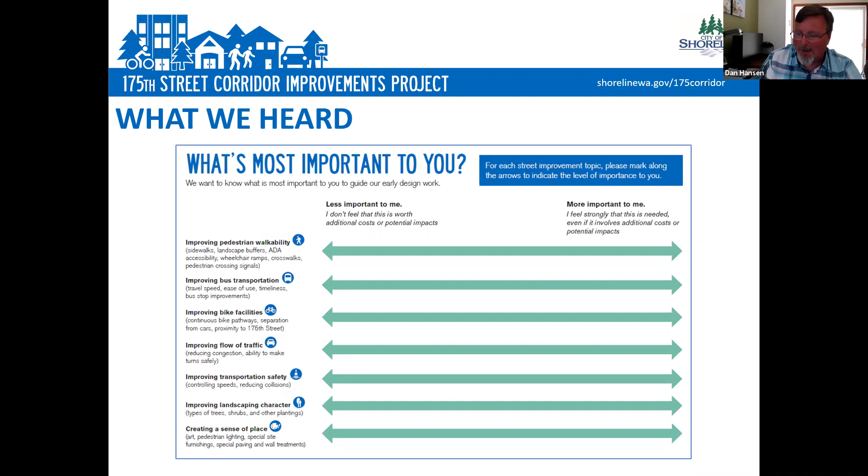So, slide 2. We had the evaluation criteria covered in phase 1. First, pedestrian walkability, or sidewalks, the ability to get through the corridor for all modes of transportation, including ADA accessibility for wheelchair ramps, crosswalks, and pedestrian signals. Bus transportation, transit speed, ease of use, timeliness, and bus stop improvements. Bike facilities, a continuous path separated from other modes so they have their own way to get to and from along the corridor.

Vehicle traffic flow, reducing congestion at the intersections in particular, and ability to make safe turns into side streets. Safety was also considered for all modes of travel, including controlling speeds, reducing collisions, and providing safe pedestrian crossings. We also asked for input on landscaping, and what kind of things you would like to see along there.

We also asked about creating a sense of place, placemaking, and we will determine potential streetscapes and designs at a later date. That's something we'll work on as we come up with the preferred alternative, which will be in the next round of outreach.

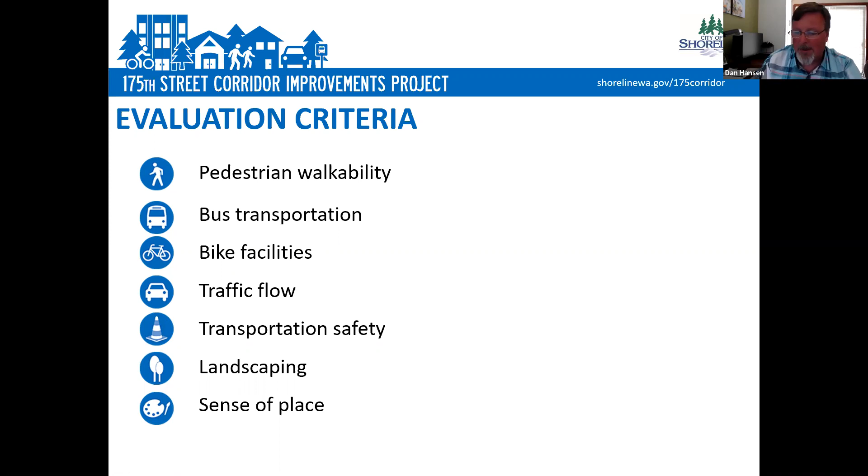So slide 3 summarizes this, and this is how things turned out. The results were weighted and ranked to show what's most important to you. You can see pedestrian walkability was obviously the biggest concern from the input of folks who participated in the survey. So in our current online engagement, we'll ask you to reaffirm that we got this correct.

So we encourage you to go to that site, put your input in, and participate in this round of outreach. We'll also be considering other, more technical issues that we'll need to review to really narrow it down to a single design concept.

We'll weigh the trade-offs of each of those criteria along with your feedback to determine the preferred concept. Items to be concluded include impacts to right-of-way and community impacts to adjacent properties, incorporating the current Meridian Park Elementary improvements along the area, the stormwater and environmental work, and what that cost and impact is, particularly to Ronald Bog in that area, as well as overall project costs.

We don't have an unlimited budget, so we'll be looking at trying to come up with a project that can be maintained by the city for the long term, as well as phasing those options.

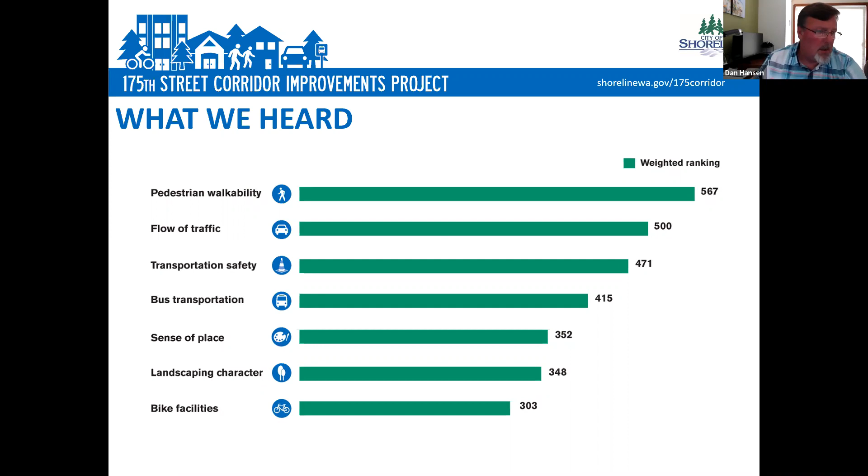So we've spent quite a bit of effort here in the last spring looking through and doing some analysis on what was happening out there along the corridor. We began our initial study of traffic flow and traffic patterns, reviewed safety requirements, and considered existing facilities like the retaining walls, and how we can incorporate those in if possible. We looked at how to make the corridor more accessible to walking, wheelchairs, and buses, and explored how to meet our transportation goals through the city's transportation master plan and complete streets policy. So the alternatives we've developed today really try to look at all those elements and how to address them best. Now I'll turn it over to Kendra to talk a little more about the traffic and the city perspective.

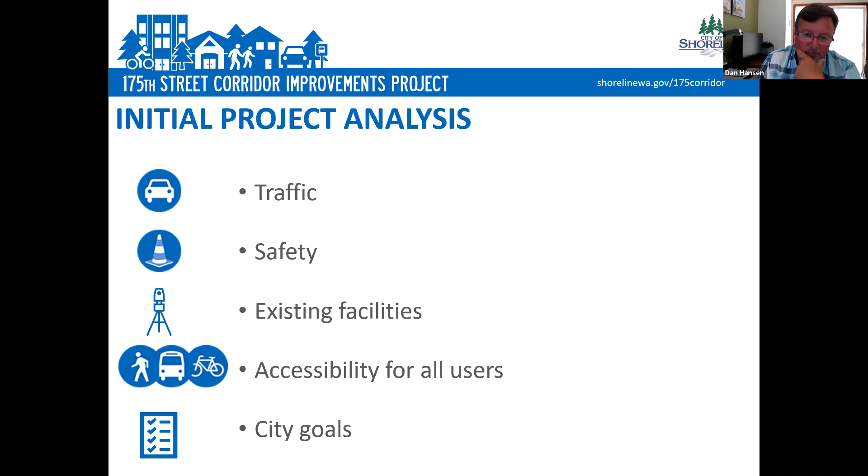Hi there, I'm Kendra Dedinsky, the City of Shoreline traffic engineer, and I wanted to provide a little background information driving the need for this project. One piece of that information stems from the transportation impact fees, which are fees paid by redevelopment that increase vehicle trips to the city's street network. These fees help fund growth projects like this one, particularly at 175th and Meridian, to ensure that delays do not exceed the city's set level of service standard of D, which is no more than 55 seconds per vehicle on average.

Also importantly, and likely somewhat unsurprising to most of you, the city's recent sidewalk prioritization process ranked this corridor highest in need of pedestrian improvements, in the context of the roadway characteristics, which include high speed, high volume, and lots of pedestrian generation.

With what we know about planned land use changes today, we expect to see an increase in traffic volumes of approximately 11% by 2040. By that time, the intersection of Meridian and 175th will operate with more delay than today if no improvements are made, and will exceed the city's level of service standard.

We expect that the freeway intersections at 175th and I-5 will increase in delay as well, but we're not currently proposing improvements at these intersections since they're outside of the city's jurisdiction, as Washington State DOT owns and maintains those intersections. However, we are proposing some adjustments to the lengths of turn pockets, for example, which should help to alleviate some of that delay a little bit.

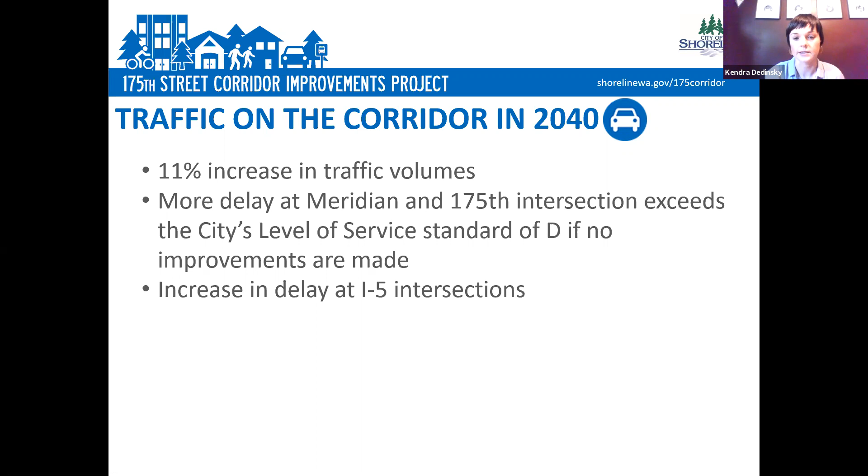And at that, I'm going to turn it over to Tara for some more specific intersection analysis and delay conversation. Thank you. I'm Tara Olsen, part of the consultant team, as Leif mentioned.

So this map here shows you the traffic flow and volumes on the roadway today. These are based on counts taken last spring, so they're very current. You may actually recognize this graphic — it's the one we showed you at last year's open house, showing the existing conditions out there. How you read this is you look at the colored dots at the intersection, and they show you the amount of delay.

The delay itself can be seen in the two boxes right next to those dots. The box on the left, the white box, is the AM peak delay. The box on the right, the black box, is the PM peak delay. When you look at those dots, a green dot indicates little delay at that intersection, an orange dot indicates more congestion, and a red dot shows you the higher congestion. I want to point out that the delay shown here is the average delay for the intersection during that peak hour.

So you might say, geez, when I go out there and take a particular movement, I feel like I see more delay than that. That's because this is averaging all the movements you're actually taking. So on the next slide—

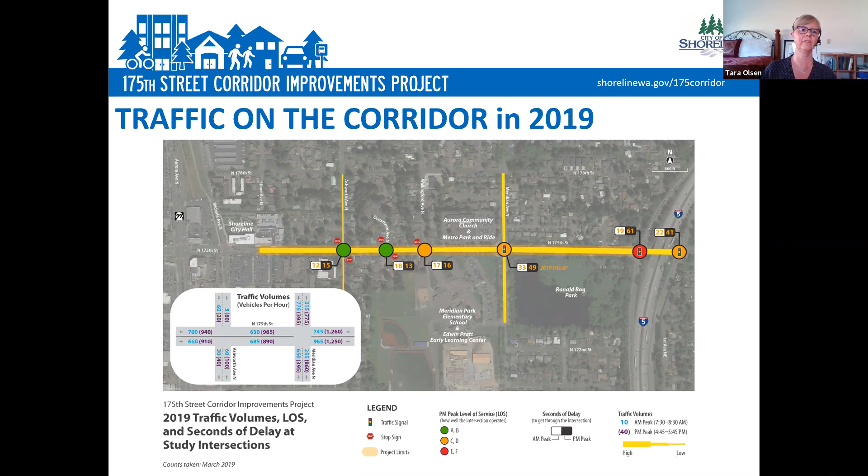—shows the 2040 conditions. As Kendra mentioned, this shows an 11% growth in traffic out there, and we're showing what it's going to look like at these different intersections. The intersection at 175th and Meridian is actually the only one we're recommending major improvements at. So you see in the no-build condition a red dot, showing the more congested scenario.

The second one down shows the signalized intersection improvement, and the bottom one shows our roundabout scenario, which I'll be showing you in a little bit. So as the traffic grows, so does the delay grow, and as Kendra mentioned, we're going to be exceeding the city standards at this intersection. She also mentioned that the freeway ramps will grow as well, but we're not looking at that as part of the project improvements.

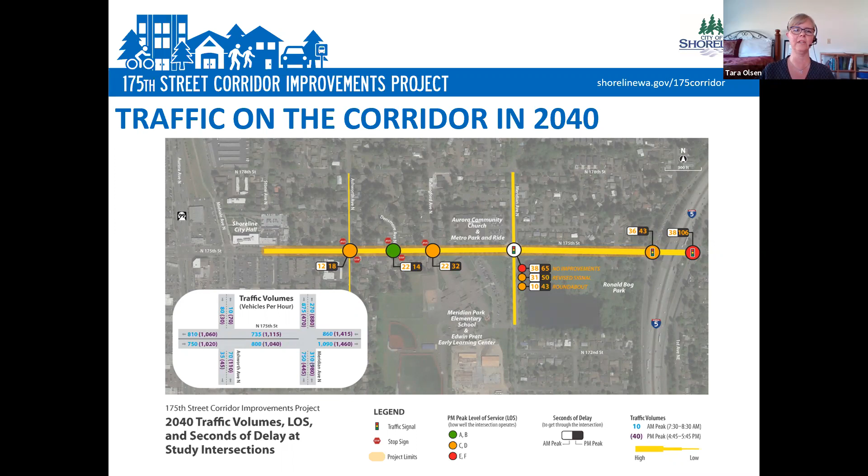Good evening. So we used the feedback that we got from you all last spring on the design criteria, as well as the analysis that Dan and Tara both talked about, to develop our draft design concepts.

There are some features that you'll see in all of the design concepts. These were things that were ranked really high on the design criteria we heard from you, like providing continuous sidewalks on both sides of 175th. Also included are high visibility crosswalks at Wallingford, longer turn lanes at Meridian and I-5 to help improve traffic flow, and we'll be keeping 2 lanes of travel in each direction like you see out there today. We're also incorporating the city's plans to develop bike lanes on Meridian and on 175th, as well as some low maintenance landscaping and streetscape design.

We also evaluated a concept that completed the sidewalk network but did not include any other improvements to the corridor. This did not really address the community feedback we heard, which indicated that more should be done to improve conditions on the corridor for safety. It also was not in compliance with Shoreline's complete street policy because it did not include bike facilities, and therefore it did not move forward as a viable concept.

Doing this evaluation of that sidewalk only concept did help us determine, though, that the major impacts to properties would be similar regardless of the design concept chosen.

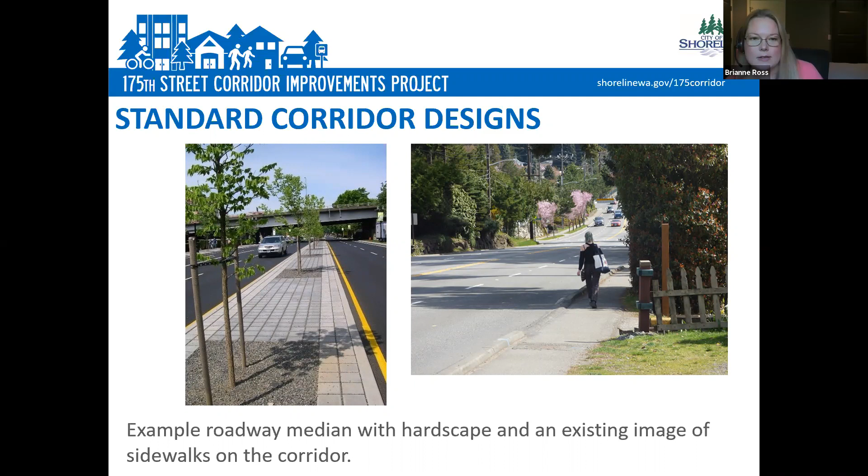So first we'll take a look at the Meridian to I-5 section. We're exploring a couple different options for this segment between Meridian and I-5, the details of which will require discussions with the Washington State Department of Transportation, and also has major considerations for the impacts to Meridian Park Elementary and the Ronald Bog Park.

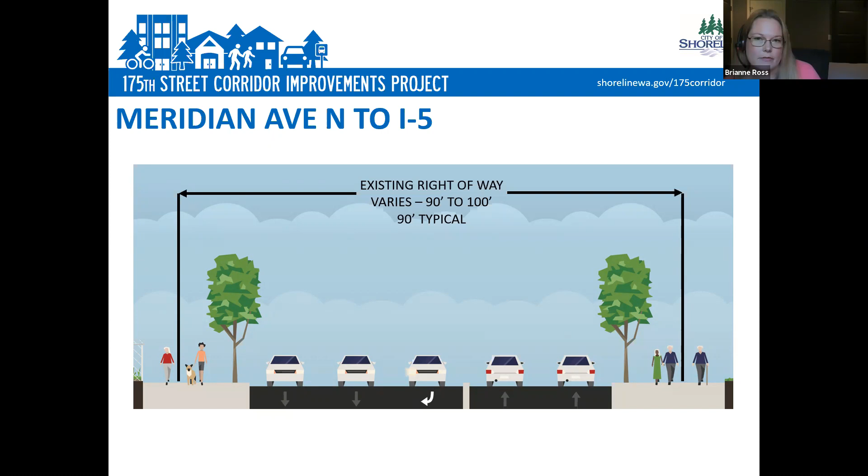All of the options will look much like you see on the screen today. They will all have the same car configuration for vehicle lanes. There'll be opportunities for trees in either tree pits or in the landscape buffer, and they all have a shared use path along both sides of 175th. A shared use path is just another word for a wider sidewalk - a sidewalk that has space for pedestrians, bicyclists, people on scooters, people in wheelchairs, and people pushing strollers. All of those people would fit on this wider sidewalk and use that shared use path facility. This will be the layout for the section between Meridian and I-5, regardless of the corridor concept A or B that is selected for the rest of the corridor.

So corridor concept A completes the sidewalk network with that wide multi-use or shared use path. It improves transportation safety with the center median, and it has a lot of opportunity to improve the landscape character with opportunity for trees both in the landscape median and in the landscape buffers. Now I will say that we're really early in our design process, so as Leif mentioned, we're really looking for input through our online open house on both concept A and concept B. We're going to use that feedback that you guys provide us and develop one preferred concept. Once we have that one preferred concept, we'll be able to dive deeper into the design details and get further along.

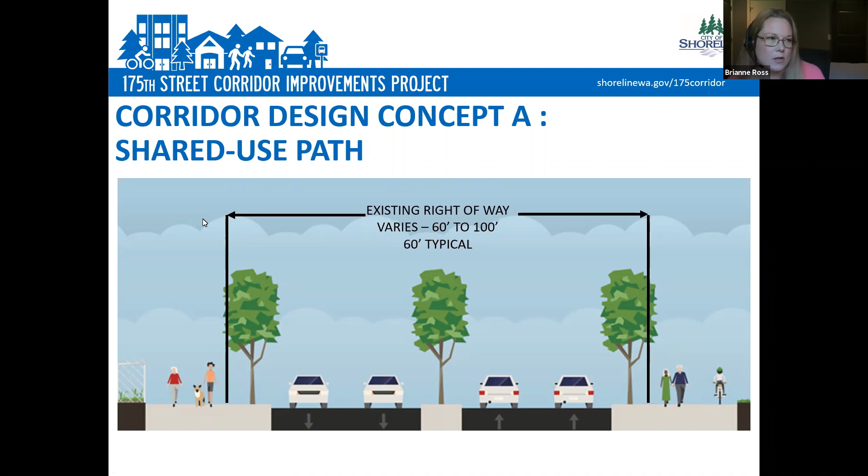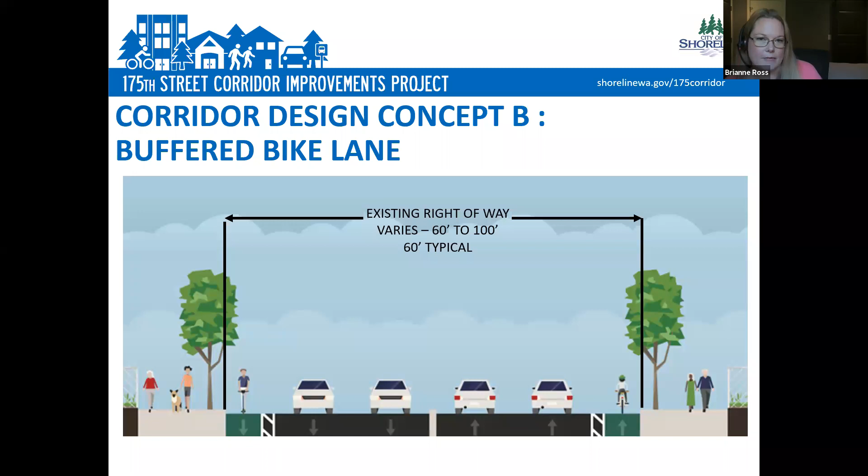So corridor concept B is what we have a buffered bike lane. So really the main difference between A and B is where the space for the bicyclists is located. This completes the sidewalk network with a little bit narrower sidewalk. It does add buffered bike lanes on the road, and it improves safety between people using the sidewalk and the roadway with that landscape buffer.

So we as a design team considered these two concepts against the design criteria that we heard from you in the first phase of engagement last spring. And I should say that we expect improvement from today's conditions for all design concepts for all evaluation criteria. So this really is, no matter what concept we move forward, it is an improvement over what's out there today. And it does really help those things that we heard were really important to you, like the sidewalks.

What we think, though, rather than just us telling you why we think these concepts meet the design criteria, we want to hear from you. What's more important is how you feel about these two concepts and how they meet your needs and rank against these criteria, which you can tell us in the online open house. We'll use those rankings to determine the preferred alternative moving forward. Now I'll turn it over to Tara to talk about the Meridian and 175th intersection design.

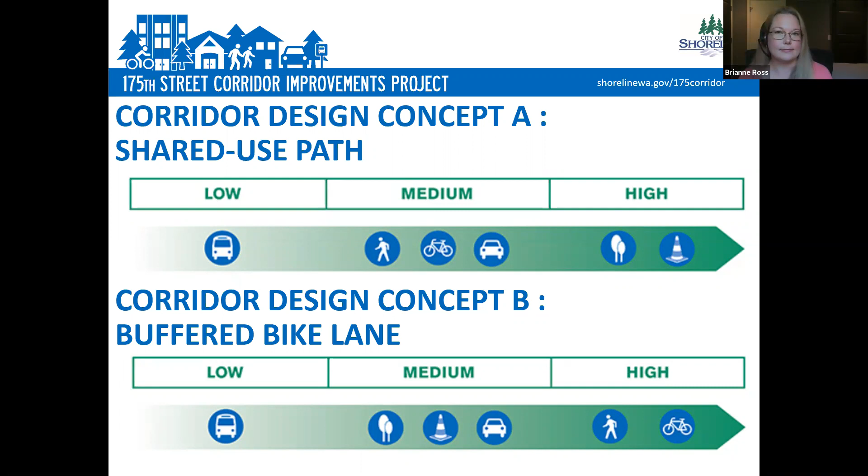Thanks, Brianne. In addition to those corridor design concepts, we also looked at two concepts at the intersection of 175th and Meridian, one being a roundabout and one being improvements to a signalized intersection. Both design concepts are compatible with corridor concept A and corridor concept B that Brianne showed, and there are pros and cons to each - the roundabout versus the signal.

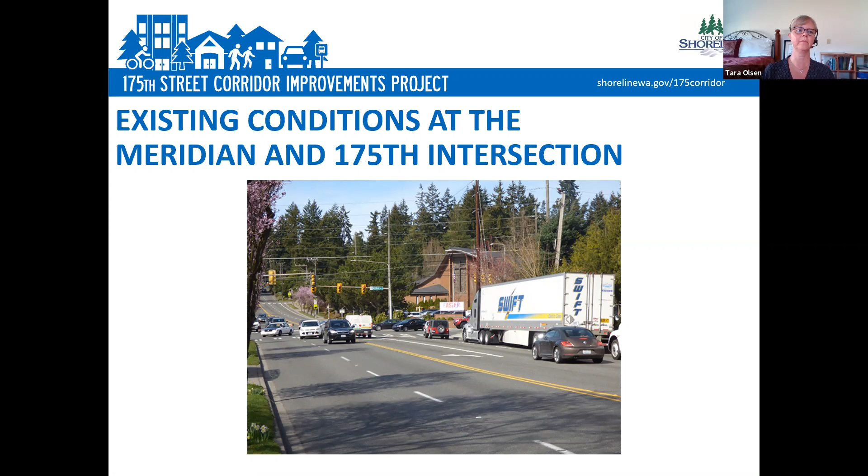The practice is always to look at a roundabout whenever a project calls for an intersection improvement. So on the next slide, we show some of the pros and cons of a roundabout. A roundabout is going to have improved safety compared to a signalized intersection, a lot of that due to the fact that you're forced to go at slower speeds as you enter the roundabout, and it's one-way traffic.

There's a reduction of delay for both vehicles and people walking. People walking don't have to wait for the pedestrian light to come on before they can cross the intersection. There's reduced air and noise pollution and lower fuel usage because there are fewer stops, less hard acceleration, and no idling, or very little idling. It tends to be a lower maintenance cost because there's no signal to maintain.

However, there are also some cons for a roundabout. For people walking, using a wheelchair, or pushing a stroller, it's going to be a bit different of an environment than at a signalized intersection, where you're actually told when to cross the road. So you're using a bit more of your own judgment there.

Drivers might not be as familiar with a roundabout, particularly a multi-lane roundabout, which we're proposing on this project. Roundabouts typically take more space, so the footprint is going to be a bit bigger than a signalized intersection. It's definitely more complicated to construct as well - instead of widening a roadway or building linearly, you're now building a circular roadway where you once had a straight roadway.

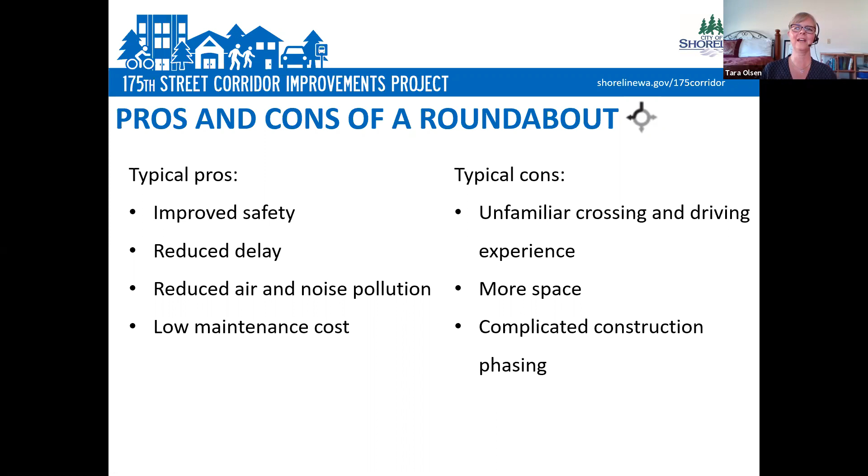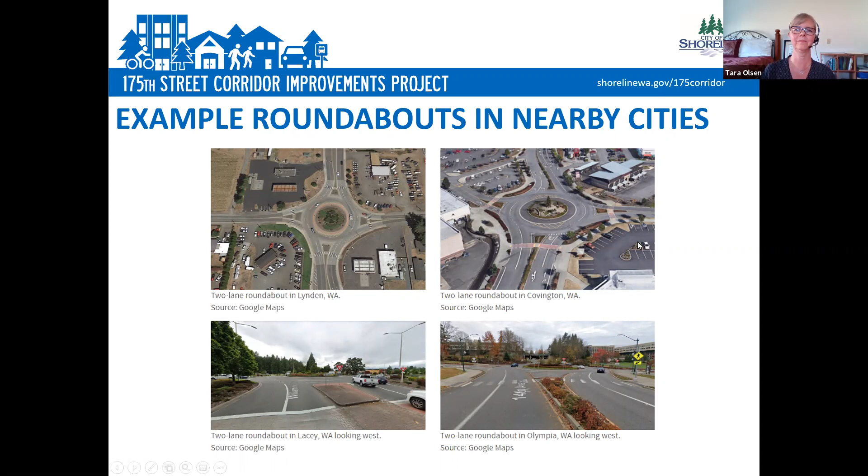So the next slide talks a little bit about the pros and cons of a signalized intersection. A signal provides a very familiar experience to drivers - they're usually very comfortable with it. It provides a very orderly movement, because you're waiting to go until the light tells you to go, as opposed to when you feel comfortable going.

It provides clearer guidance to people walking and crossing those crosswalks in a wheelchair, pushing a stroller, or on bicycles. But it does have some cons - it has a higher maintenance cost due to maintaining the signal, and it can also fail during a power outage. It can cause delay for people walking, biking, and traveling by vehicle, particularly during non-peak hours, because you're having to wait for the light. And it has more conflict points and potential for higher speeds than a roundabout does, which can result in a poorer safety outcome for vehicles as well as people walking and biking.

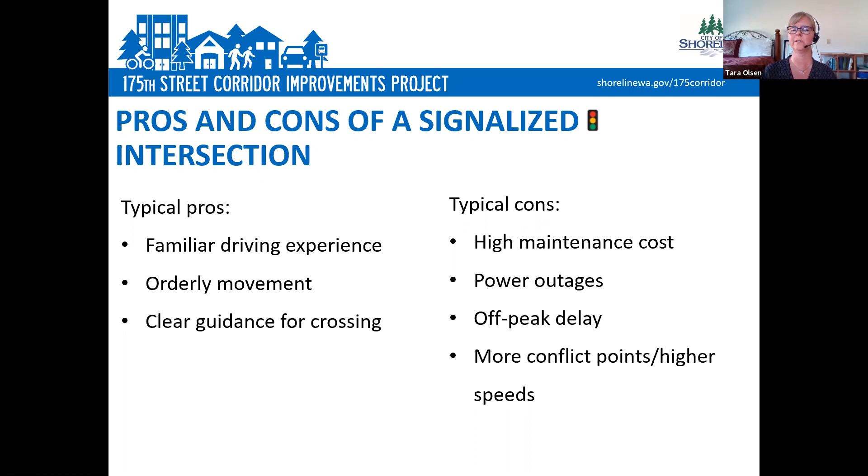The next slide is going to show you what a roundabout concept actually looks like. It's a two-lane roundabout, with two lanes circling it. You've got your existing four entry points. A roundabout does provide some opportunity for landscape medians - you see the hardscape medians in brown, and the landscape median, particularly in the center, in green. That provides a great opportunity for some public art or placemaking.

There's enhanced efficiency based on today's signal as well as the future signalized option, and shorter crossing distance if you're crossing at the crosswalk. Each crosswalk, though, I do want to point out, will have a pedestrian-activated warning sign, a flashing sign similar to what's out at the school today.

I do want to point out also that people biking along 175th or Meridian will not actually be biking through the roundabout. They will be forced onto the sidewalk to cross at the crosswalk. We don't want the mixing of vehicles and bicycles within the roundabout itself.

This concept does require reconstruction of the newly constructed shared use path out in front of Meridian Park Elementary. We did, in developing this concept and the signal concept, look at the future bike lanes along Meridian that are part of the city's plan, as well as how these designs meld with the frontage improvements at the school.

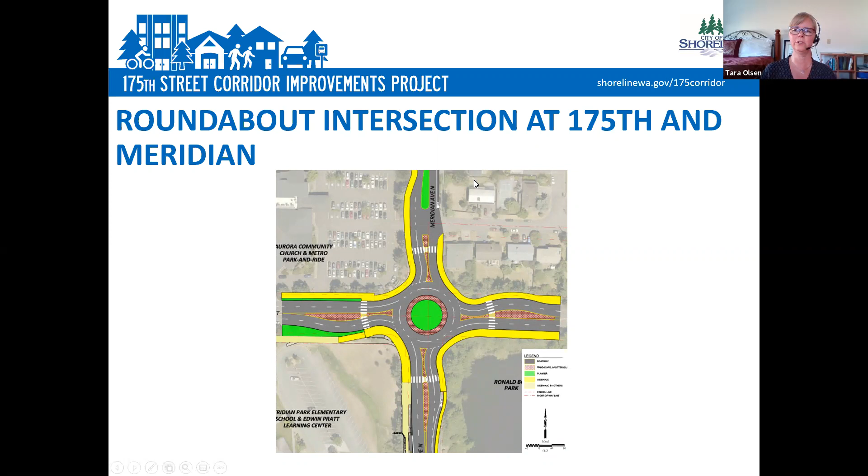So the next slide shows you our signalized intersection improvements. It looks very similar to what's out there today. One of the main differences is the lane configuration on the north leg.

We've actually revised that to be 2 left turn lanes and then 1 through and right shared lane. This allows the northbound and southbound left turn movements to go at the same time, which makes the signal operate more efficiently with less wasted time at the signal. This design also provides a longer westbound left turn pocket onto Meridian.

Kendra had mentioned that we also looked at extending a left turn pocket to the freeway. This concept improves vehicle capacity over the existing condition and provides a really consistent walking path for people using the crosswalks. It incorporates the newly constructed shared use path in front of Meridian Park Elementary, and again, just like the roundabout concept, incorporates the future bike lanes on Meridian as well as the frontage improvements at the school.

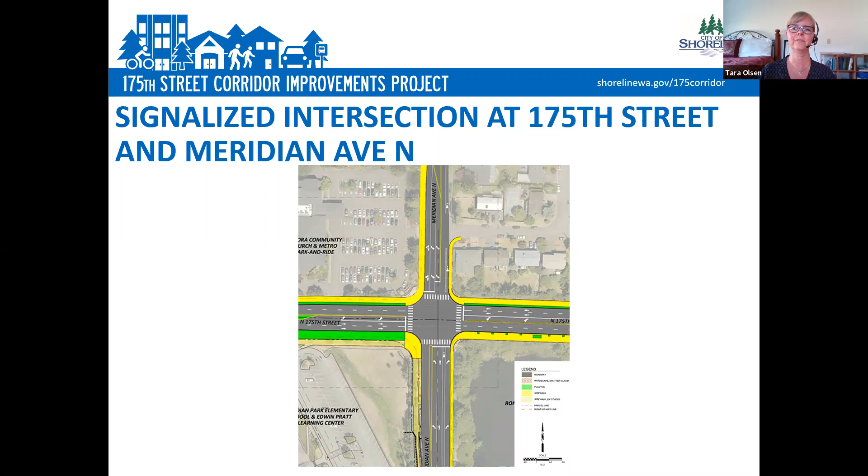The next slide, similar to the one you saw with the corridor, shows you how we evaluated the intersection improvements versus the roundabout versus the signalized intersection. Please go to that online open house and provide us some feedback on these criteria and the evaluation of them. Now I'm going to turn it back over to Leif, who's going to talk about the project timelines.

The project timelines.

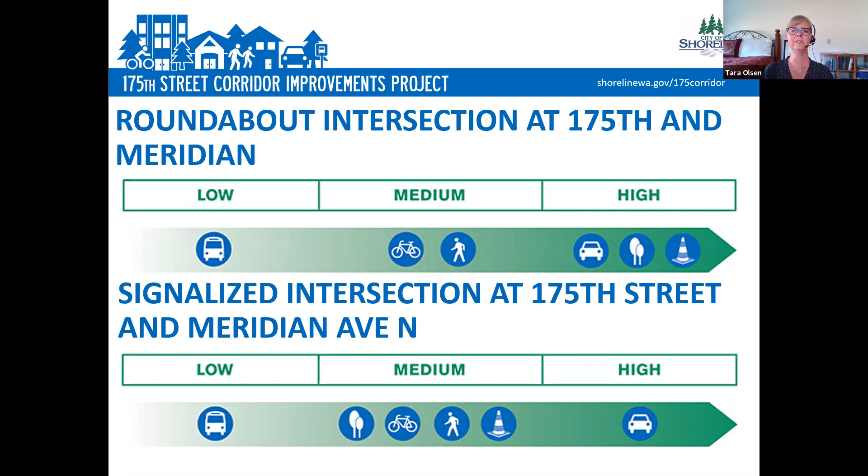Thanks, Tara. Again, thank you for your flexibility in switching over to online and virtual platforms for this outreach. As you can see from our timeline here, over the last months we've been meeting with property owners and other stakeholders, and we've done all of that in virtual meetings. Initially that had all been supposed to be in-person meetings, but due to COVID we had to make some adjustments, and it's gone quite well.

Moving forward, we will be collecting all of the input that we get in our surveys, and as mentioned, we'll be refining our design concepts into that preferred design concept, and coming back to you this winter to share that and collect more information from you. Next slide.

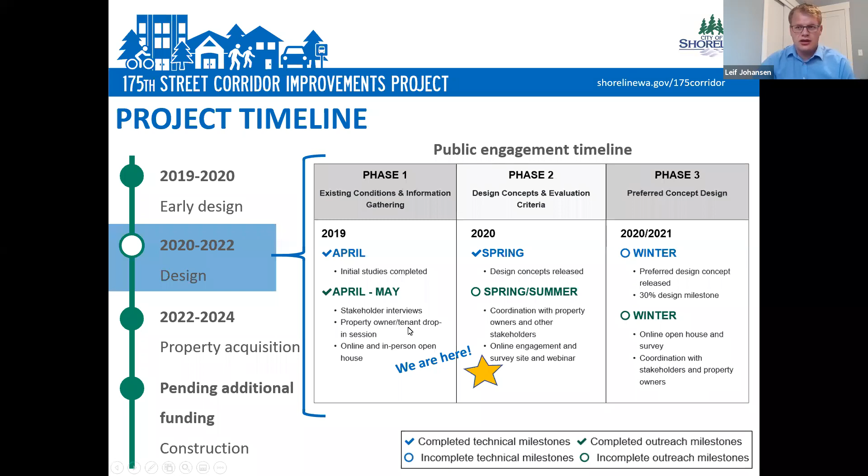Going back to our online engagement and survey website, this is really the critical place where we need you to log in and fill out your surveys. There are 2 ways to get into this site. One is you can go to our general project website and then follow links into the survey website.

So you type in shorelinewa.gov/175corridor and then follow the links to the online open house, or you can just go directly in by typing 175corridor.participate.online, and that'll take you right into our survey.

Our online open house has been live since July 6th and will remain open until August 9th. So you do have a little bit of time to get in there and take a look at our information and fill out your surveys.

Any questions that you may have, don't hesitate to reach out to me, give me a call or send me an email, and I'll do my best to help you along. That's really important to us to provide that service. My contact information is all over the place, but certainly on the last slide of this presentation we'll have that up for you as well.